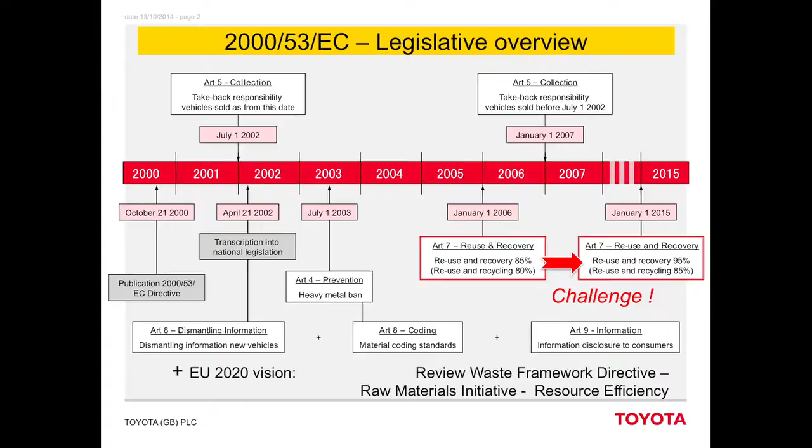Also, the EU is leading the world. The EU is basically the only area where there is really strict end-of-life vehicle directive at this moment in time. Many others are watching, many others are thinking about catching up, and in places like Japan, for example, legislation is starting.

The targets are increasing, and one of the things we're also facing is when we get new legislation, there is sometimes some inconsistency as well. So there is some clash sometimes, and there's been a review recently of the chemicals regulation.

So there are banned substances within the end-of-life vehicle directive, but also now we have REACH, which is the chemicals management. We have the other waste directives. There's crossover with waste electrical goods, because you can imagine there's radios and things like that in cars as well. Who takes responsibility for those? And there's batteries as well. On top of that, there is other environmental and safety regulation as well, so we have quite a lot to consider in that area.

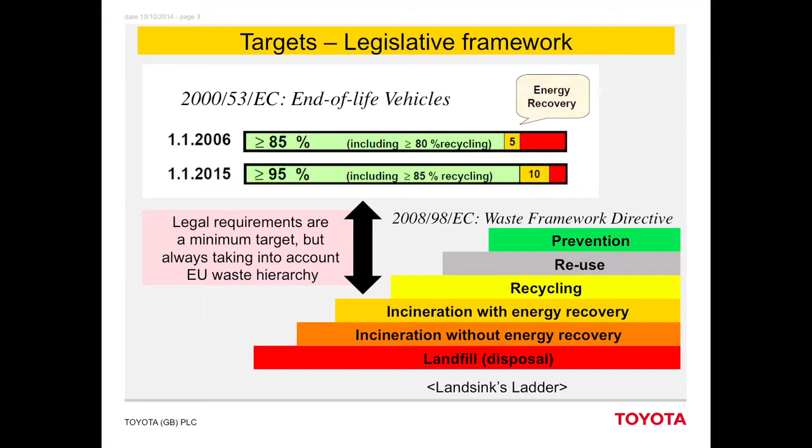You can see here a representation of the actual targets. The directive stated for 2006 that we had to get greater than 85% - 80% was recycling, and 5% could be energy recovery, and the rest could still go to landfill. In fact, now for 2015, we've got a target of greater than 95%, and that has to include 85% recycling. There's an allowance for 10% energy recovery, and only 5% is allowed to go to landfill.

You can see also there that there's great amount of stock placed upon the waste hierarchy as well, and whilst we recognise what was mentioned during some of the other presentations, that we shouldn't regard this as just a staircase that we're climbing up - we should aim at the top. Inevitably, some things are being pushed up through that waste hierarchy as we go.

So this is just an indication of some of the operations we touched on yesterday. There's the dismantler operations, where actually they will take off certain parts which are required to be taken off by law, such as batteries. They will also take out the catalyst. The reason they do that is purely financial, because there's no requirement to take it out at that stage, but actually the catalyst has some value because of the precious materials within it. But also, this is where the depollution activity takes place.

This is where we drop out all of the fluids from the vehicle - air conditioning fluid, which is recovered, oils, brake fluid, other types of materials such as that. And then, typically, a dismantler will also take off parts that he knows he can resell. He may take off some parts to put into stock, things like headlights, fast-moving items, but also he will probably respond in these days to internet requests for parts.

So if you want a part for a 1998 Corolla or something like that, you'll be able to put a bid out onto a website, and you'll get dismantlers offering you various parts for that. So that part is actually quite well covered.

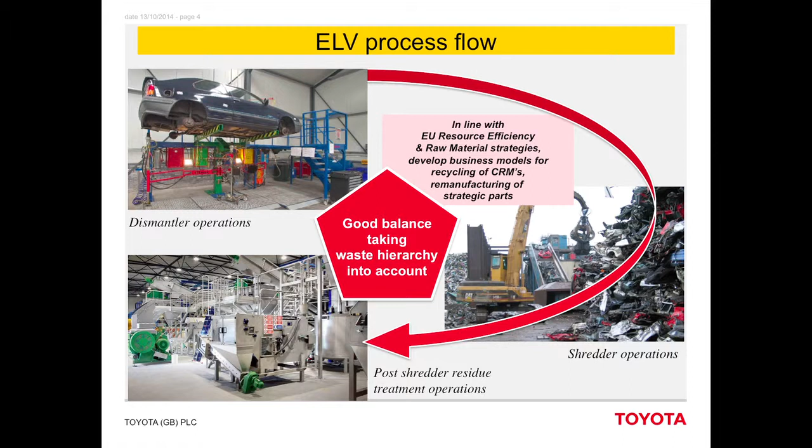Finally, what happens then is it goes into the shredder operations, and Graham's in the audience here today. They are very efficient operations these days, and the environmental efficiency is further improved now by the investment - and it is huge investment that is required to put in post-shredder residue equipment so that we can actually separate out materials by various mechanical and chemical sorting methods.

So at this moment, we would say we've got a fairly good balance. Basically taking over a little bit to provide more details on what's happening at the different stages. So the first step of depollution is required by law, as Steve was explaining. And then what happens next is really driven by the market demand, so financially, what is profitable to do.

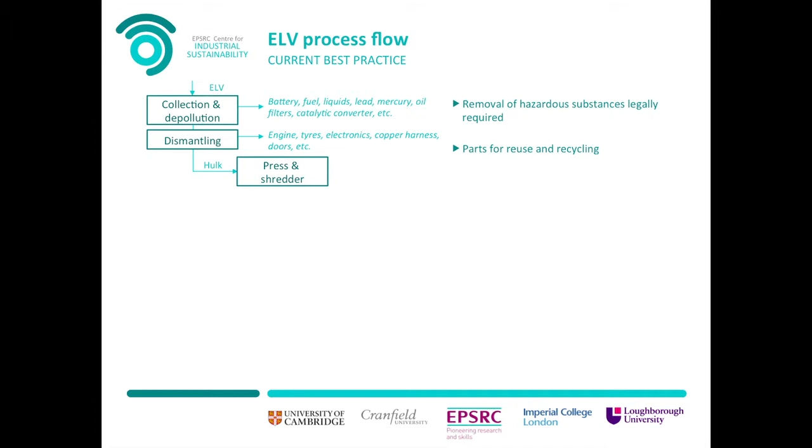What I wanted to highlight here is what's happening on the right-hand side of this slide. We have certain parts that are being collected and recovered at different stages, and actually, the earlier we can recover those parts and materials, the more pure the material will be, so the more potential there is for reuse or even resales for spare parts. So what we want to do is address as much as possible the treatment before the shredder.

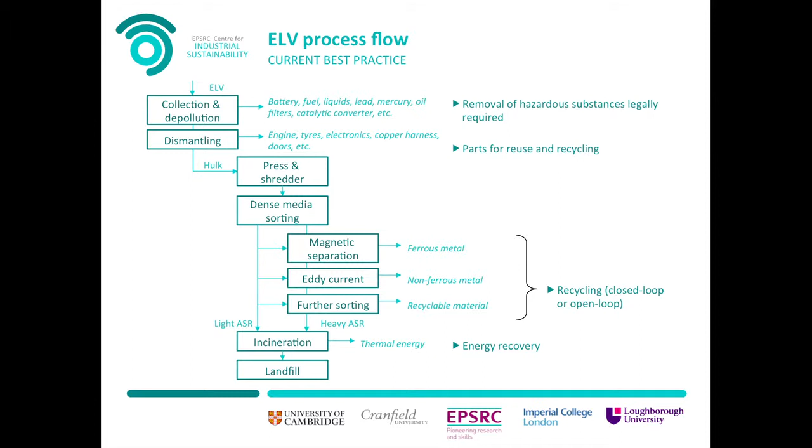There's quite a lot being done on the sorting technologies for post-shredder residue, but we still really want to increase the quality of the waste coming out of this process. So we really want to focus on the earliest processes. I have another slide that explains that a little bit better, based on the targets for 2015, where we have only 5% allowed to landfill.

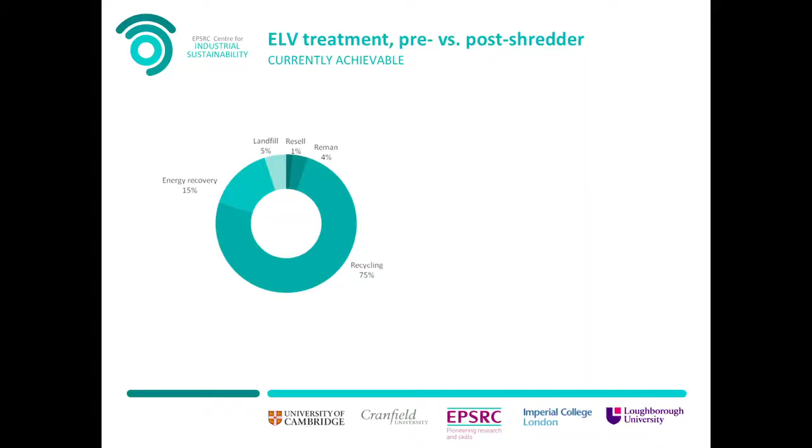I believe that for recycling, we should separate between high-value recycling and low-value recycling, because what we can recover after the shredder tends to be less pure, so you cannot recycle the material for the same application. You will have some quality loss in the material. We call this vertical or open-loop recycling. What we would like to target, if possible, is horizontal or closed-loop recycling, where you have the same quality of material and therefore can reuse it for the same application.

This is true particularly for critical materials such as copper or rare earth metals, and materials that are being used in batteries and electric components.

That's what we really wanted to highlight in this study, that most of the value will be in pre-shredder processes. We believe that at least 20% of the vehicle mass can be dismantled and processed. But now the question is how we can do that in a profitable manner.

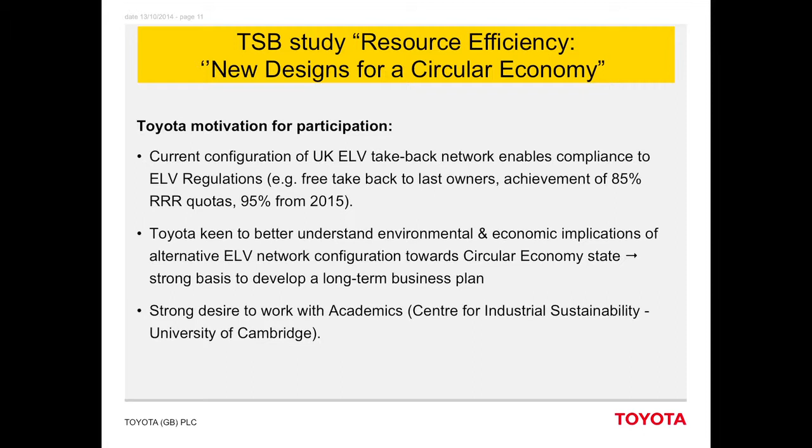And also we want to try to go, as Melanie said, into a more circular economy, and try to get at least more materials being used as post-consumer materials back into use again. And ideally, what we want to try and do is get car-to-car recycling as well. We're able to demonstrate on certain components that we're able to achieve that, like battery-to-battery recycling, for example.

And we had a strong desire also to work with the academic community on this so that we get some impartiality, because often if we're asked and we give our own results, people will question whether it was in our vested interest to say that. So we've taken a very much hands-off approach to this to a certain extent, and let Melanie continue this study to give us some validation.

Logistics is involved there too, because we have to ship spare parts to the dealers. The actual in-use phase accounts for a lot - in terms of CO2, about 85% of the car's impact comes from the in-use phase. Then the bit we're talking about, trying to join the loop together, is the end of the road.

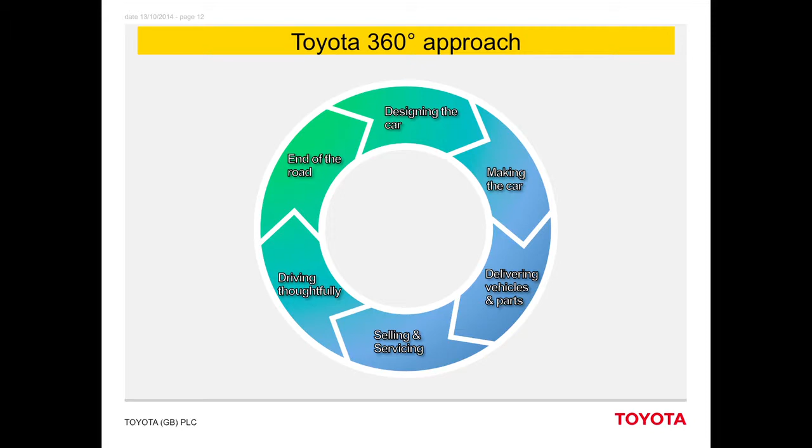Melanie will take us through a bit more about the cycle and how we've implemented it. So basically what we wanted was to take the Toyota 360 approach and try to understand what the end-of-life consideration would be for each one of those steps. The early measures and material selection come first.

We've heard about product design earlier, and about critical materials - rare earths, rare metals, etc. In our case, we were interested in understanding how we can allow a closed loop circulation of parts and materials, particularly when thinking about future vehicles and how they can be compatible with vehicles on the road today.

This means in-between vehicles, between models, between generations, or even between brands, because Toyota, if they decide to invest in facilities, may need to recover vehicles that are not only Toyota in order to increase their yield rate. So we were trying to understand how to build a stronger incentive in recovering parts at the dismantling stage - maybe thinking about designing products that are modular, upgradable, and compatible between models and generations.

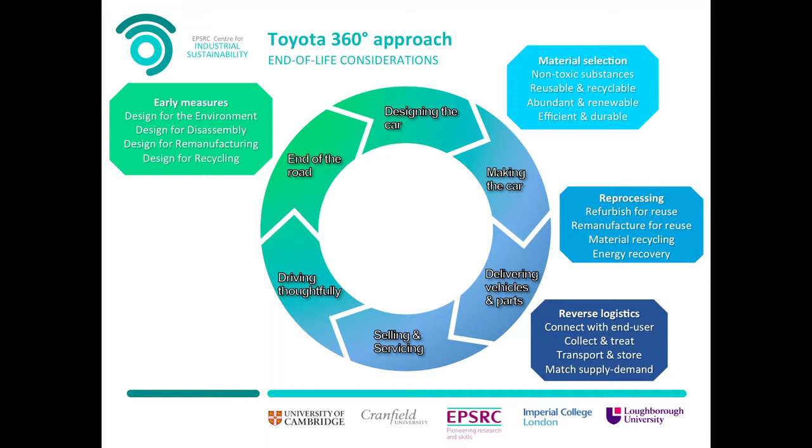Another important consideration: in the same way we think about manufacturing products and distributing and selling them, we may want to think the same way about end-of-life vehicles. So how do we reverse this system? It's collecting the products, reprocessing them, and redistributing the parts, the spare parts, where they are needed.

Whether in new vehicles, which is probably a much longer-term plan, or how we can reuse those spare parts in vehicles already on the road - more like repair and maintenance schemes. That links to thinking closely about how we can make a business model that generates profit throughout the life of the vehicle, rather than focusing purely on sales - we've heard about leasing schemes or repair and maintenance programs, as Riversimple was highlighting a bit earlier.

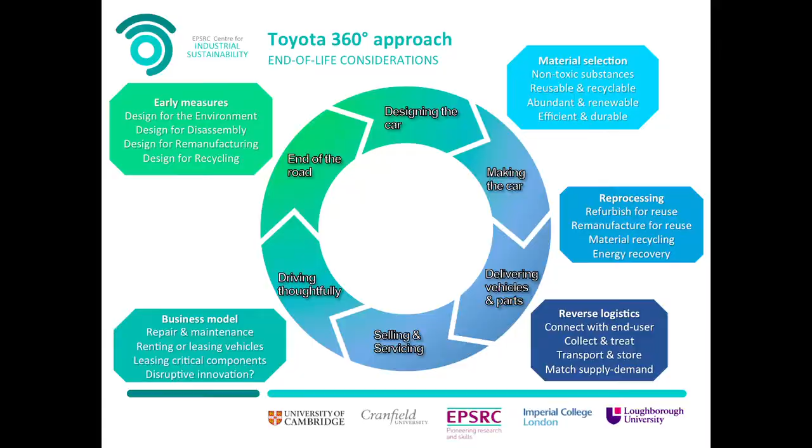What we realized looking at all these issues is that we need a very collaborative approach to make this system function. It's very much what Hugo was mentioning earlier about this ecosystem view of the whole value chain - each player will selfishly optimize their own system, but if they don't have a shared vision of what they're trying to achieve, they may end up with a suboptimal solution, and we may not be able to reach the EU targets for the whole EU.

Coming back to material composition, I think what the material composition evolution is really highlighting is how components are becoming more complex and more diverse, and you have more embedded value in parts. So there's definitely a big incentive to recover the parts.

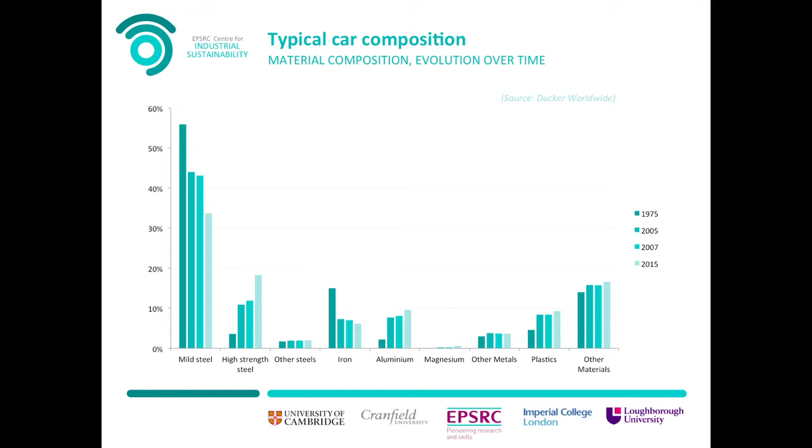But because of this increasing complexity and diversity, the job is not going to get easier - on the contrary, it's probably going to be harder, even if we design vehicles today to be easier to dismantle and recover. Most vehicles coming in the next 10 years or so were designed 10, 20 years ago. So we need to think about how to overcome those technical issues, and the presentation yesterday by Mike was showing dismantling technology is going to play a very big role in helping us improve the efficiency of reprocessing.

During this study, we actually identified quite a lot of issues - I'm not going to take you through all of them because there are a lot. But one difficulty was that they're not all easy to quantify or assess in a classic financial business model. So we understood these are further discussion points if we wanted to implement any of the configurations that Steve is going to present a bit later.

I think the most important elements we really need to think closely about are, first of all, the yield rate - making sure we have sufficient volume to make the system viable. That may mean more central treatment of ELVs rather than scattered across the whole country, but that will involve quite heavy logistics.

If you think about the natural material flow currently occurring, vehicles reaching end of life in the UK may be exported still as vehicles that can go on the road in another country. This is already happening with a lot of vehicles being exported to Poland, and we know a lot of factories are based in Eastern Europe. So you have this natural flow of ELVs going from where they were manufactured to the UK, and then going back to where they were manufactured.

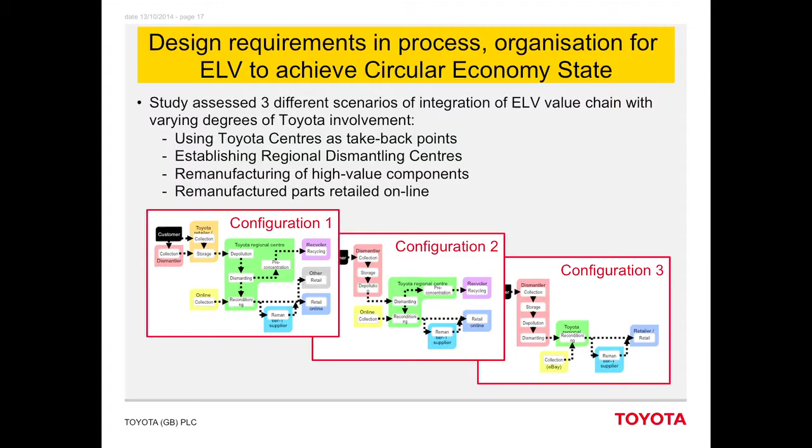So that's being quite independent, to establishing some regional dismantling centres where we could try to concentrate the number of Toyotas together in one place to maximise our opportunities - looking at removal and remanufacturing of high-value components, and even possibly reconditioning end-of-life vehicles and used vehicles and selling those within our own network, using some recovered parts from end-of-life vehicles, and also looking at remanufactured parts which we could then retail online.

So there's 3 configurations. This is the first, where we take a lot more control than is normal. The customer would bring the car back to the Toyota retailer or repairer, who would collect it, store it, and ship it as quickly as possible to a regional centre - maybe 3, 4, 5 of those centres dotted around the country - where we would do the depolluting and dismantling.

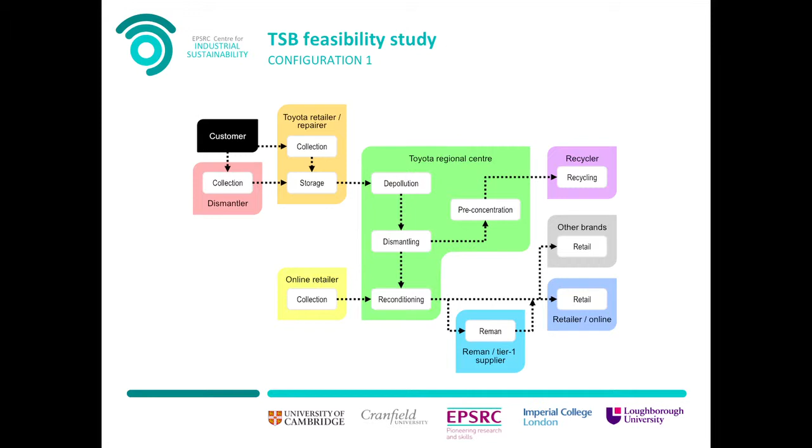We might consider some parts for separation for remanufacturing, reconditioning, etc., and then try to pre-concentrate. This is following on from what we mentioned yesterday - destructive dismantling, maybe taking off as many plastic parts or similar materials, taking out engines and gearboxes, which isn't traditionally done at this stage. We could then send those materials to appropriate recycling partners. We don't intend to start our own shredders, for example - I'm sure Graham will be quite happy about that.

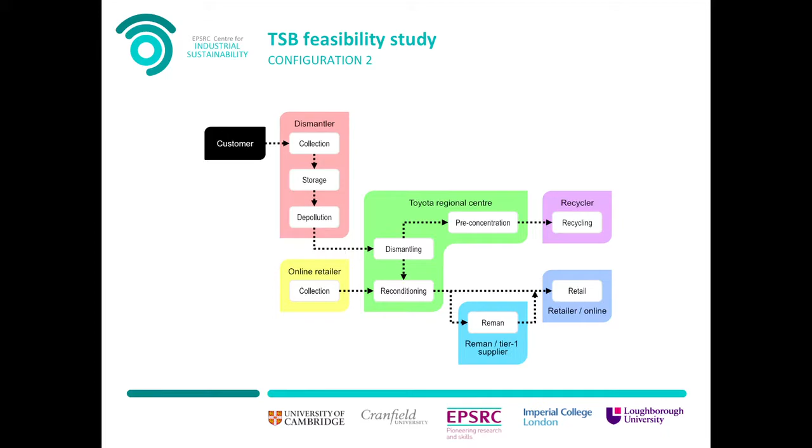In configuration 2, it's a slightly different approach, using the existing dismantler chain as we're familiar with - they would collect, store and depollute, but then instead of shipping vehicles to the shredder, they would ship them to a Toyota regional centre where we would do those same sort of activities again.

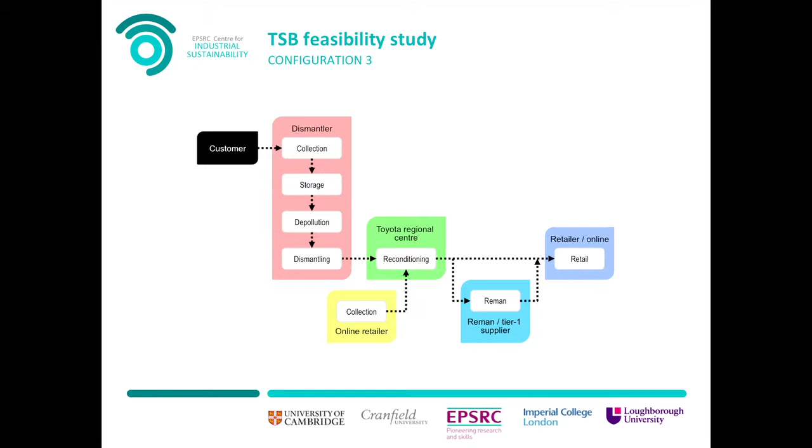And the final one is basically, probably you'd say, as is today - the dismantler would do as much of the dismantling as necessary, maybe extract some parts that Toyota might wish to reprocess. We might collect those together at a reconditioning centre, probably with a supplier, and then retail those as well. So three different extremes, moving between two extremes of our involvement as a company.

So with that, we were able to make a couple of conclusions realistically: that using Toyota centres as take-back points is a feasible option, although not necessarily desirable from the dealer's point of view. We could also look at these regional dismantling centres and the high-value components, and we studied the business viability, economic, social, and environmental benefits of each of those scenarios.

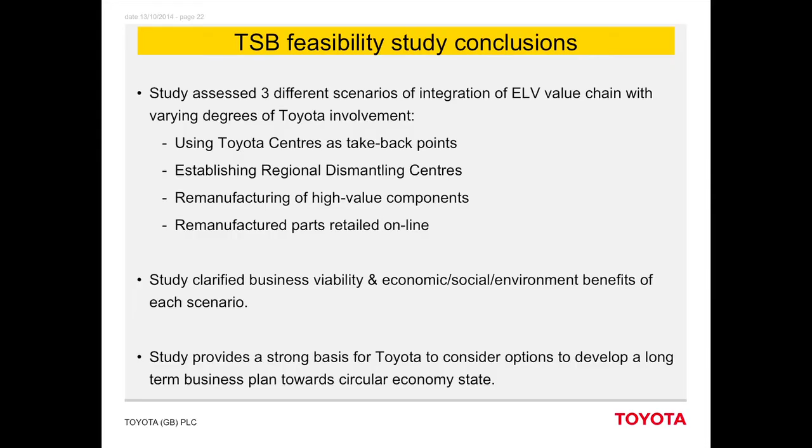This is feeding into our confidential study, and the study will now provide us a really strong basis to consider options for the long-term business plan. So this type of process and project can be very helpful to our organisation, getting an independent view and feeding some very valuable information into our study.

Hopefully that explains a little bit of what we've been doing. So if there's any questions.